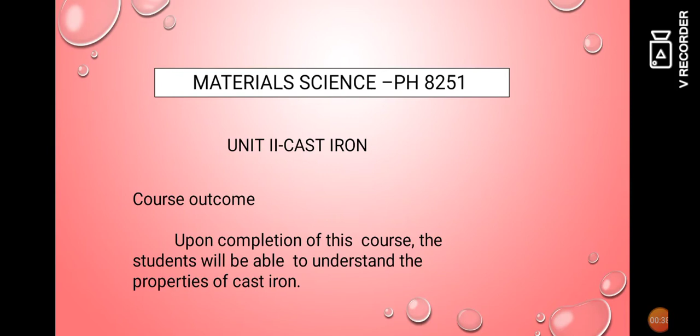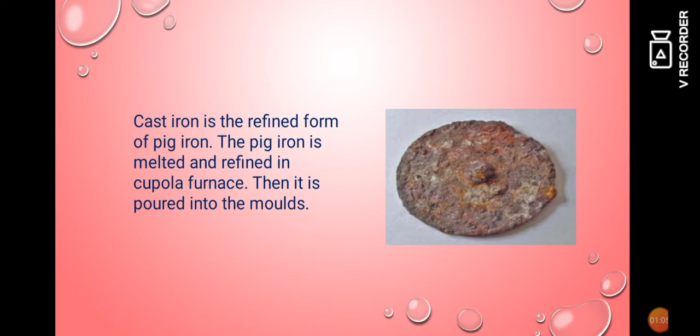Cast iron is a refined form of pig iron. The pig iron is melted and refined in a cupola furnace. Then it is poured into the molds. So in this picture we can see the ancient cast iron which is found in China.

Now let us see how cast iron is produced. Here the pig iron is got from iron ore and it is melted, and the molten pig iron is mixed with some alloying elements such as manganese, chromium, molybdenum, titanium, vanadium, nickel, copper, etc. When these alloying elements are mixed with the molten pig iron, new as well as different types of cast irons are formed.

So there are different types of cast irons available. They are white cast iron, grey cast iron, malleable cast iron and ductile cast iron.

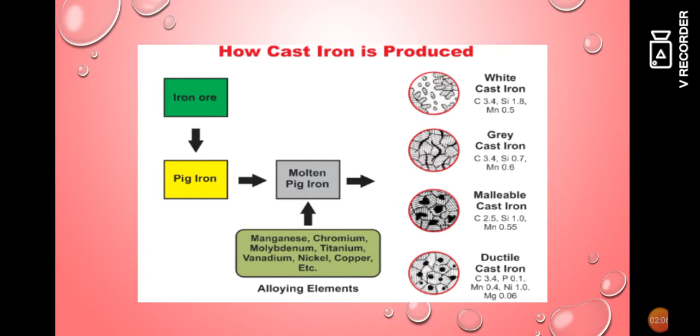Now let us see the composition of cast iron. The term cast iron refers to those iron carbon silicon alloys which contain 1.8% to 4% carbon and usually 0.5% to 3% silicon. Cast iron is an important engineering material with a number of advantages, mainly good castability and machinability and moderate mechanical properties.

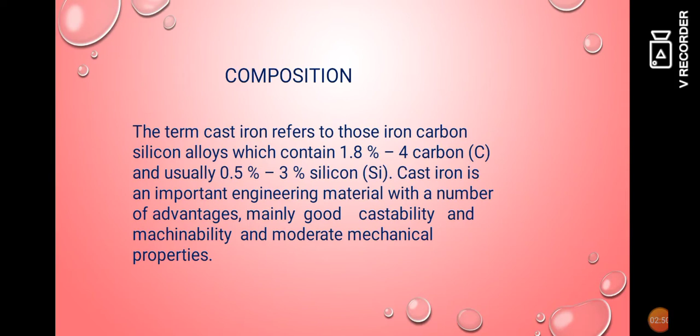Now let us see the types of cast iron. In general, there are 4 different types of cast iron. The first one is white cast iron, the second one is grey cast iron, the third one is ductile cast iron, and the fourth one is malleable cast iron.

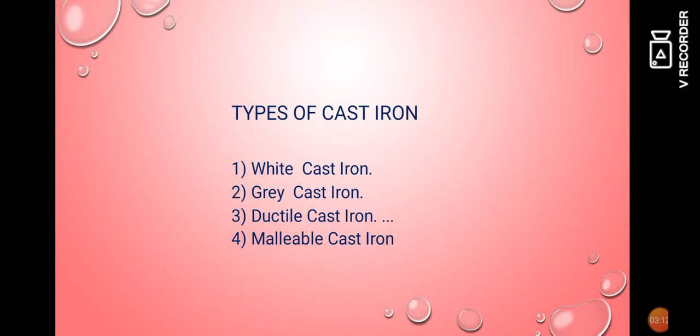Let us see the first one, white cast iron. White cast iron contains 1.8% to 3.6% carbon, 0.5% to 1.9% silicon and 1% to 2% manganese. White cast irons are so called because when broken the fracture surface is white. This is unlike the grey fracture surface normally associated with other cast irons which contain graphite.

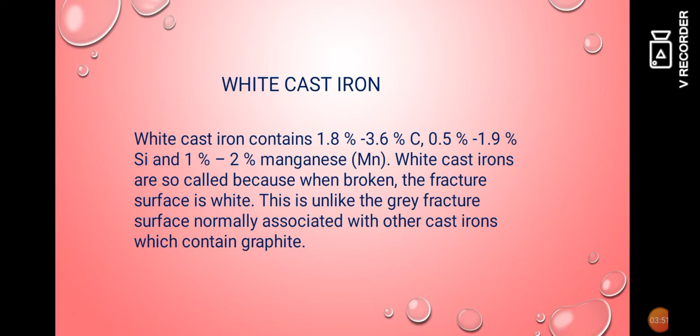While not as common as grey cast iron, white cast iron is another type worth mentioning. It receives its namesake from its off-white color, which is the result of iron compounds known as cementite. Like grey cast iron, white cast iron features many small fractures.

Let us see the microstructural arrangement of white cast iron. When we compare this cast iron with the remaining two, it appears a little bit whiter than the other two cast irons, as shown in the figure.

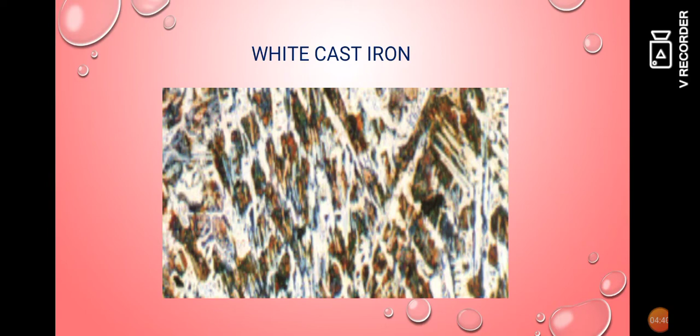Now let us move to the second type of cast iron. It is grey cast iron. Grey cast iron is a broad term used for a number of cast irons whose microstructure is characterized by the presence of flake graphite in the ferrous matrix. Such castings often contain 2.5% to 4% carbon, 1% to 3% silicon, and some additions of manganese ranging from 0.1% to 1.2%.

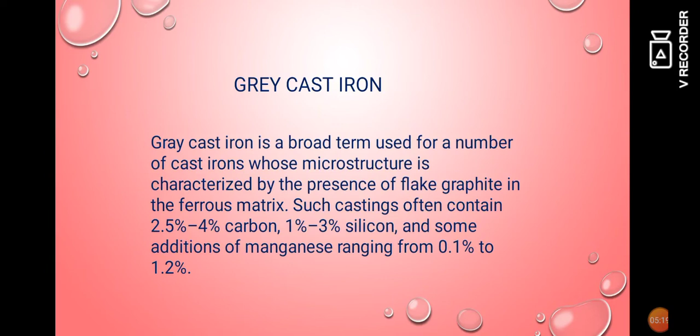The most common type, grey cast iron, features a graphite microstructure consisting of many small fractures. It is called grey cast iron because the presence of these small fractures creates the appearance of a grey color. When grey cast iron is broken, the fractures open up to reveal the grey colored graphite underneath the surface.

Now let us see another type of cast iron, that is ductile cast iron. Ductile cast iron, also referred to as spheroidal or nodular iron, is actually a group of irons that exhibit high strength, flexibility, durability, and elasticity due to their unique microstructure. Ductile cast iron normally contains over 3% carbon. It can be bent, twisted, or deformed without fracturing. Its mechanical properties are similar to steel and far exceed those of standard cast irons.

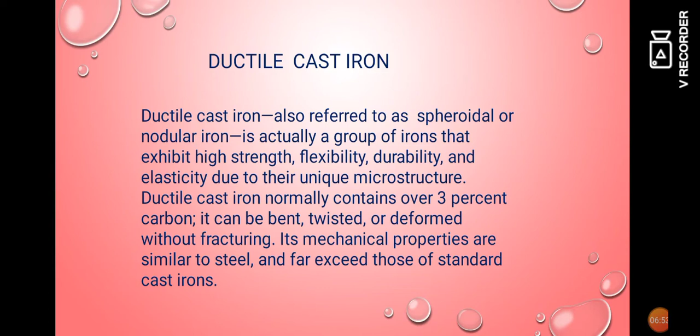Also known as nodular cast iron, ductile cast iron is a type of soft iron alloy with a high carbon content. It is typically made with trace amounts of other compounds, including magnesium and cerium. When added, these trace compounds inhibit the speed at which graphite grows, thereby keeping the metals soft and ductile. Ductile cast iron was invented in the early to mid 1940s.

Here we see the difference between grey cast iron and ductile cast iron. In the grey cast iron, the black lead are as shown in the figure, but in the case of ductile cast iron, the black lead are almost spherical in nature as shown in the figure.

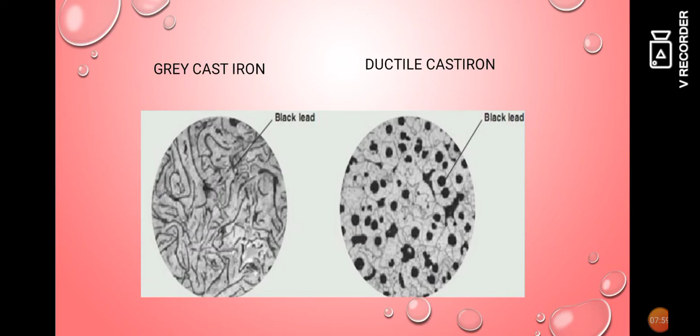Now let us see another type of cast iron, that is malleable cast iron. Malleable cast iron also sometimes contains small amounts of chromium, 0.01% to 0.03%, boron 0.002%, copper up to 1.0%, nickel 0.5% to 0.8%, and molybdenum 0.35% to 0.5%.

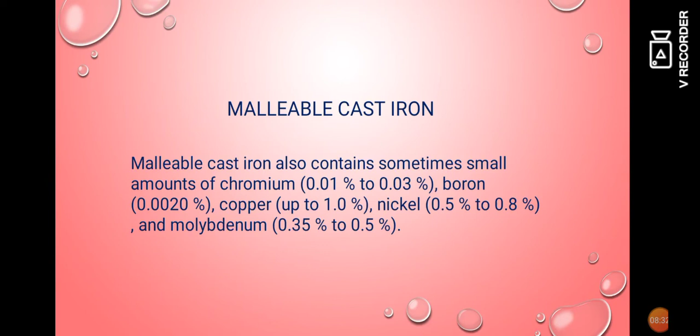Malleable cast iron is easily workable. It is typically created using heat treatment processes on white cast iron. The white cast iron is treated for up to 2 days, after which it is cooled. When finished, malleable cast iron can be bent and manipulated to achieve unique shapes and sizes.

This figure shows the image of malleable cast iron. Here the structure is entirely different from ductile cast iron as well as the first one.

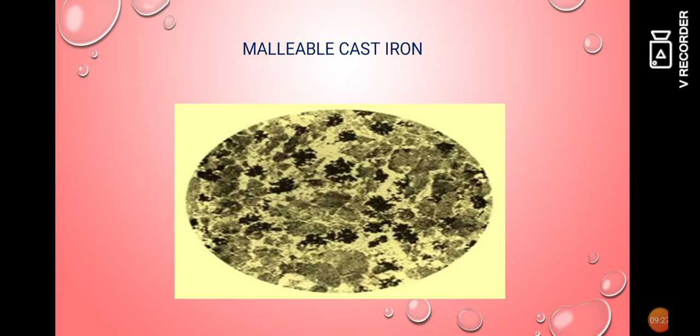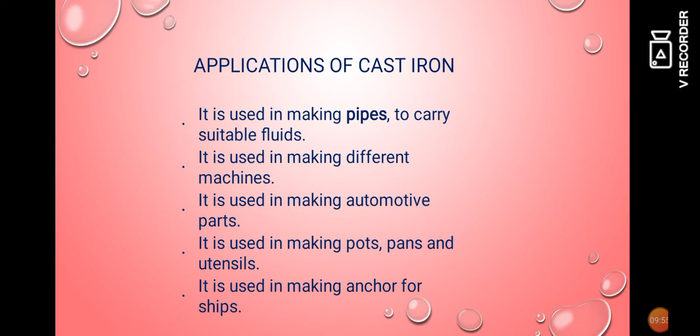Now let us see the various applications of cast iron. It is used in making pipes to carry suitable fluids. It is used in making different machines. It is used in making automotive parts. It is used in making pots, pans, and utensils. And also it is used in making anchors for ships.

So in this picture, we can see the different applications of cast iron. They are used in the manufacturing of motors, anchors in ships, and also cookware materials.

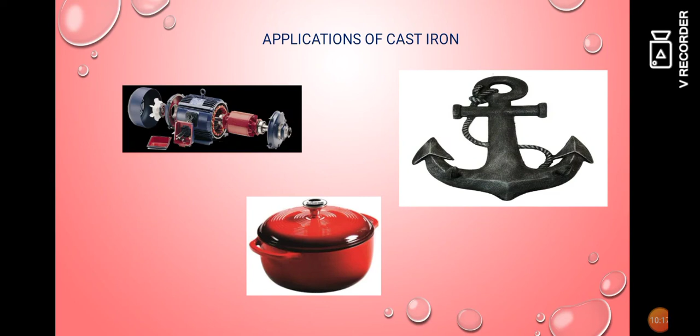So in this video, we have clearly seen the various types of cast iron and the applications of cast iron. Thank you.